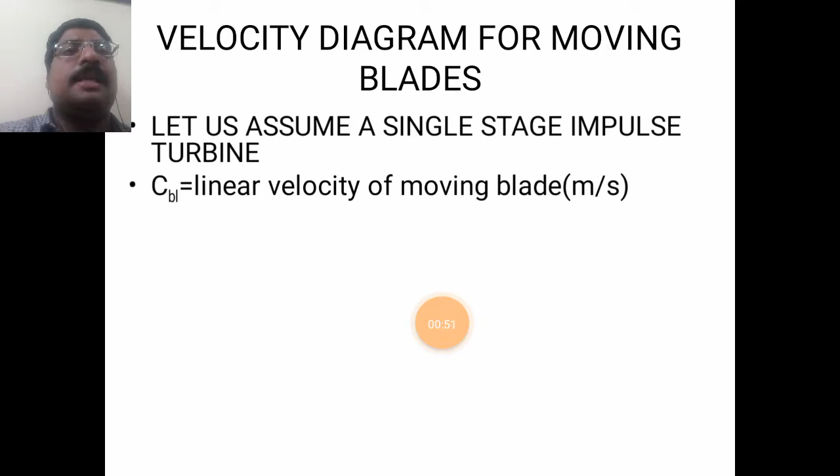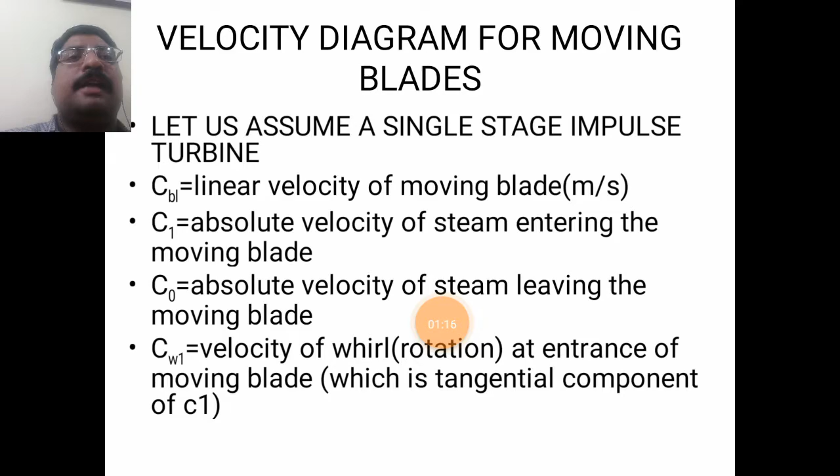C1 is the velocity of the steam entering the moving blades. C0 is the velocity of the steam leaving the moving blades. CW1 is the velocity of whirl, that is, velocity of rotation at the entrance of the moving blade, which is the tangential component of C1.

CW0 is the velocity of whirl at exit of the moving blade, which is the tangential component of C0. CF1 is the velocity of flow at the entrance of the moving blade, which is the axial component of C1.

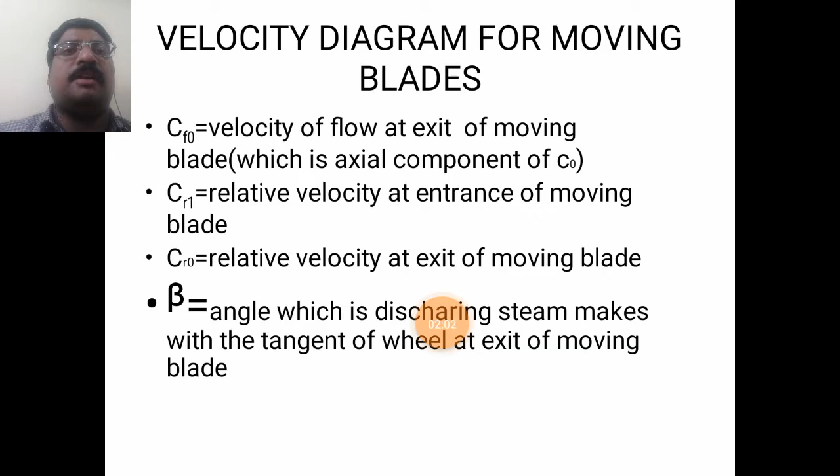CF0 is the velocity of flow at the exit of the moving blade, which is the axial component of C0. CR1 is the relative velocity at the entrance of the moving blade, and CR0 is the relative velocity at the exit of the moving blade.

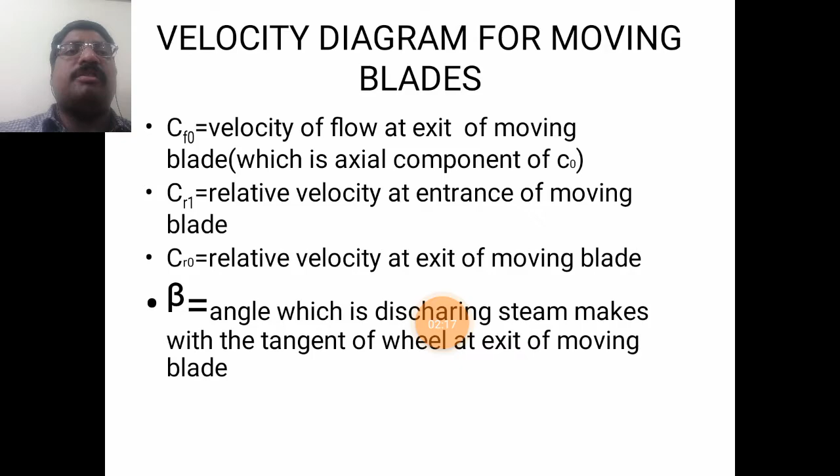Beta is the angle of discharge steam making with the tangent of the wheel at the exit of the moving blade, and alpha is the angle with the tangent of the wheel at which the steam velocity C1 enters, known as the nozzle angle. Theta is the entrance angle of the moving blade, and phi is the exit angle of the moving blade.

The steam jet issuing from the nozzle at velocity C1 impinges on the blade at an angle of alpha. So from the nozzle, arranged at angle alpha, the steam with velocity C1 impinges the moving blade.

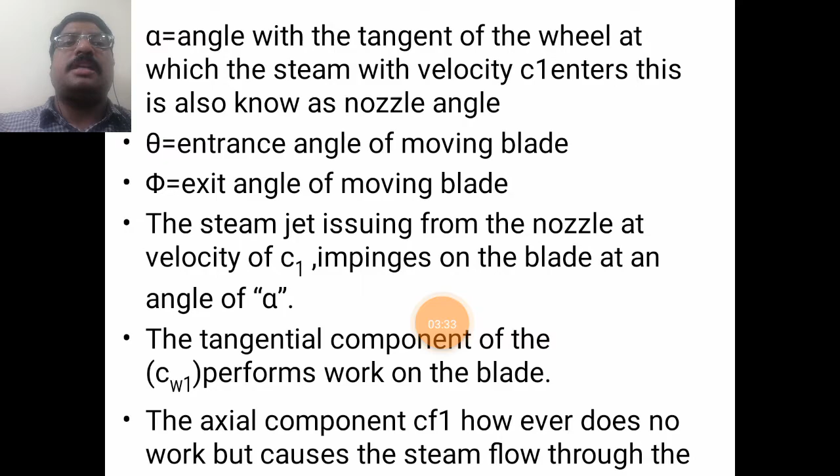The tangential component CW1 determines the work on the blade, while the axial component CF1 does no work but causes the steam to flow. So CF1 helps determine the flow of steam, and CW1 helps determine the work developed on the wheel or turbine.

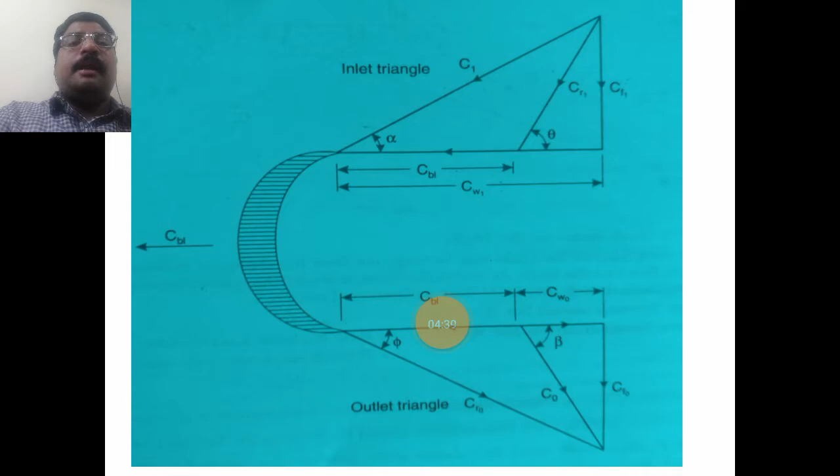Now, the combined velocity triangle. We are making a combined velocity diagram of both the inlet and outlet triangles, in which alpha, theta, phi, and beta are all represented.

We know that work done is force into distance traveled. So force developed is m into (CW1 minus CW0), and the linear distance traveled is CBL. Therefore, the work done can be taken as mass into CBL into (CW1 plus CW0).

Why do we take CW1 plus CW0? Since CW0 flows in the negative direction, we always take it as negative. Therefore, we express work done as m into CBL into CW1 plus CW0, which we can rewrite as m into CBL into CW.

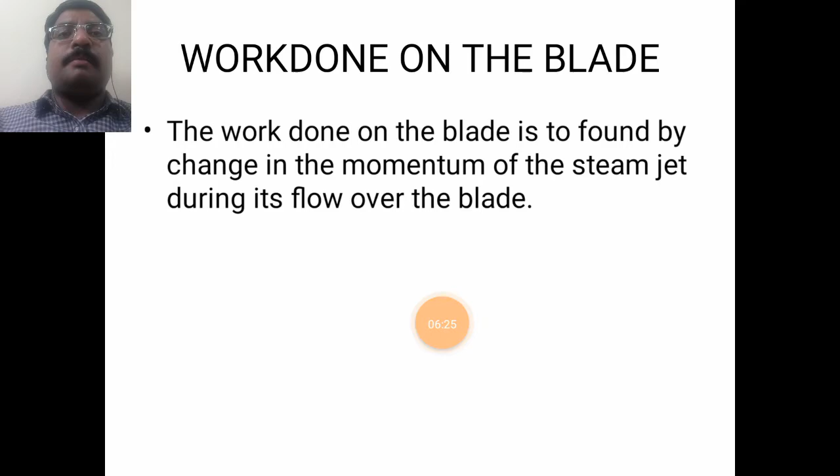So what is the work done on the blade? Work done on the blade is the change in momentum of the steam jet as it flows over the blades. Whenever steam flows over the blades, the change in momentum determines the amount of work done. From Newton's law, force equals mass of steam into acceleration. Work done equals force into distance traveled, and power developed is force into distance traveled.

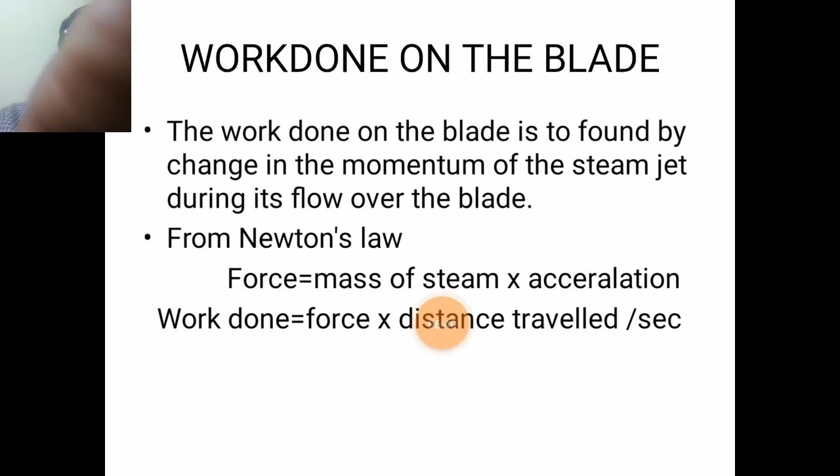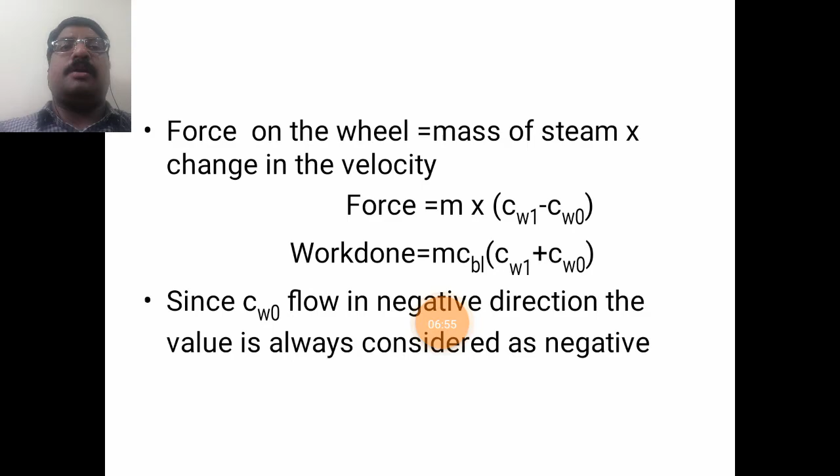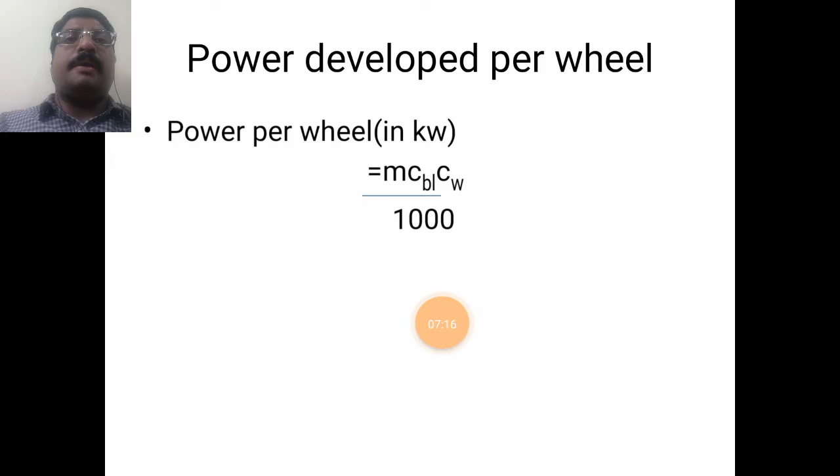Next is power developed per wheel. Power developed per wheel is nothing but work done divided by 1000, giving us kilowatts. The work done is mass of steam into linear velocity into CW, where CW is nothing but the summation of CW1 plus CW0.

Now the blade efficiency. Blade efficiency is the ratio of work done on the blade to the energy supplied to the blade, which is nothing but kinetic energy. The energy supplied to the blade from the nozzle is kinetic energy.

The formula for kinetic energy is half m v squared. So in the numerator, the work done on the blade or wheel is ms into CW into CBL. In the denominator, we take half m c1 squared. Bringing the denominator to the numerator, we get 2 m s CW CBL divided by m c1 squared. That is the blade efficiency, or velocity diagram efficiency.

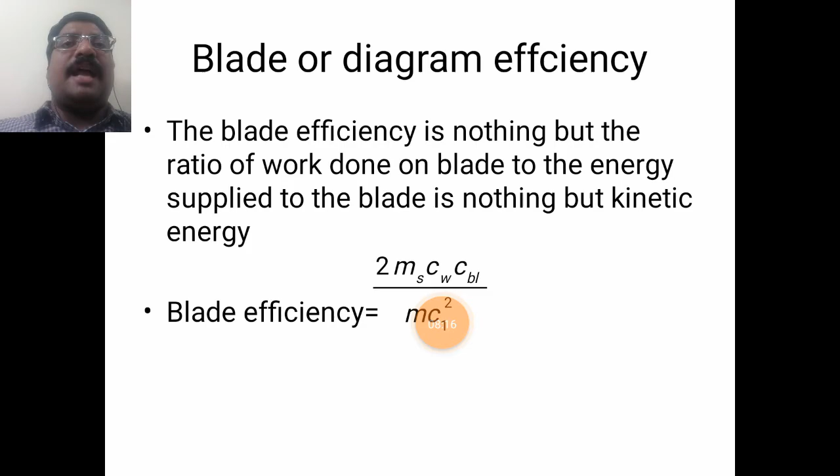Next is stage efficiency. Stage efficiency is the ratio of work done by the blade per kg of steam to the total amount of heat drop. During expansion of steam in the turbine, there is a pressure drop that takes place, along with a heat drop. This amount of pressure and heat drop is determined using the change in enthalpy.

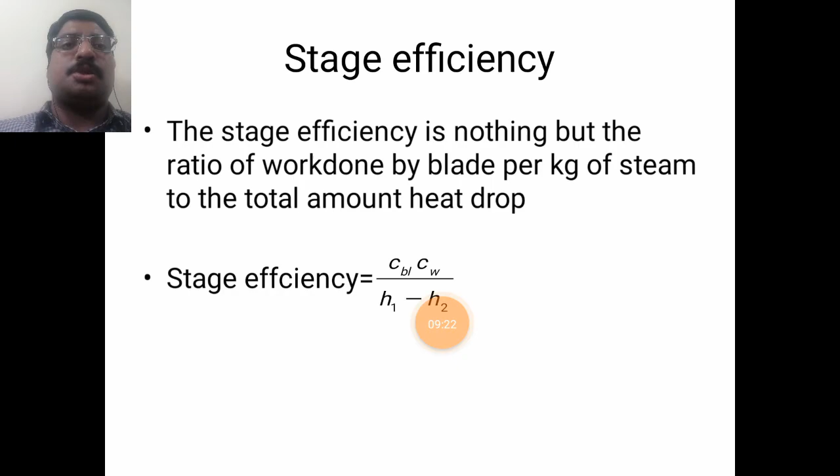Therefore, stage efficiency equals work done, which is ms into CBL into CW, divided by H1 minus H2. If we consider mass equal to 1 kg, since stage efficiency is defined as work done by the blade per kg, then work done becomes CBL into CW divided by enthalpy drop H1 minus H2. This is the formula to determine the stage efficiency.

Next, what is the axial force on the wheel? As before, force equals mass into axial acceleration. The axial forces are CF1 at the inlet and CF0 at the outlet, so we take it as mass into CF1 minus CF0 for the axial force. This axial force on the wheel must be balanced or carried by thrust bearings. Whatever axial force is developed by the steam must be balanced, otherwise tilting of the turbine may happen if excess axial force is exerted.

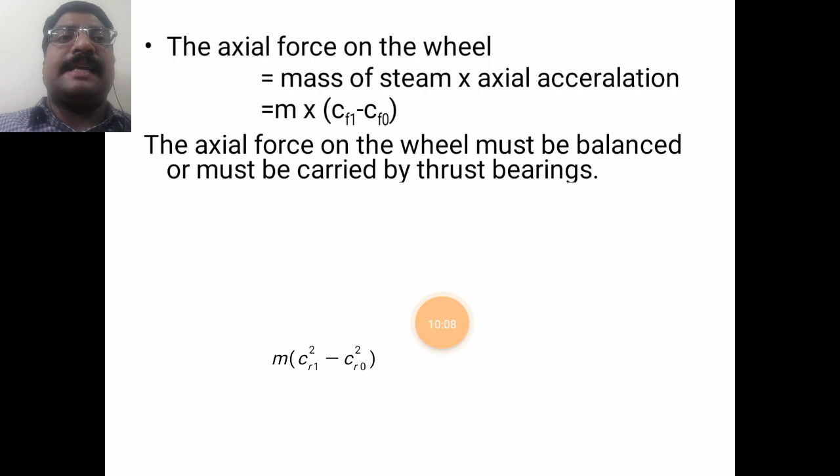Next is energy converted to heat by blade friction. The amount of energy converted by blade friction equals the loss in kinetic energy during flow over the blade. This loss in kinetic energy can be determined using the formula m into CR1 squared minus CR0 squared, where CR1 and CR0 are the relative velocities at the inlet angle and outlet angle respectively. By using these relationships, we can determine or analyze the impulse turbine.